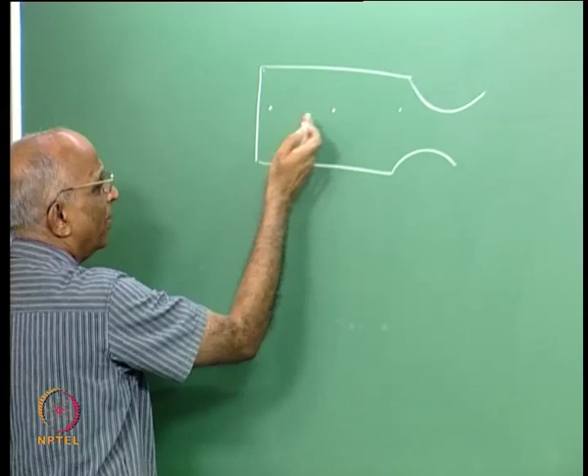In the fundamental mode, if this is a closed end, I have a pressure antinode. If this is also a closed end, I have a pressure antinode here, and in between I have a pressure node. For higher harmonics, I get a set of pressure antinodes and pressure nodes alternating.

Also, wherever we have a pressure antinode, you could have velocity nodes and vice versa. Now what is the inference of all this? Let us say at a particular point I have a pressure perturbation P, from the standing wave.

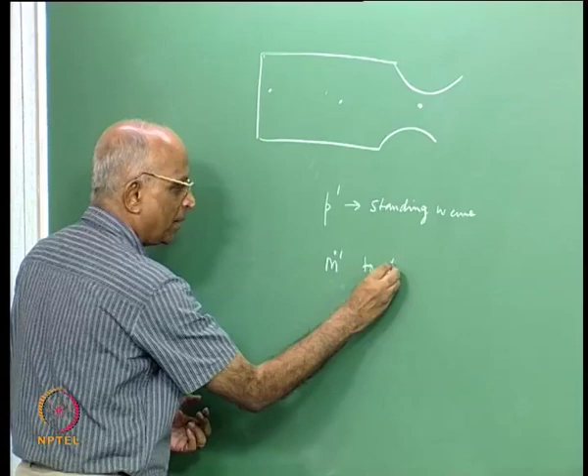I want P prime to increase. What can cause an increase in P prime? If I were to add mass, m dot prime, to a volume that has pressure P prime, then automatically I get an oscillation of P prime. If I add mass at the moment of maximum P prime, my oscillation goes up. I add mass again, pressure goes up further.

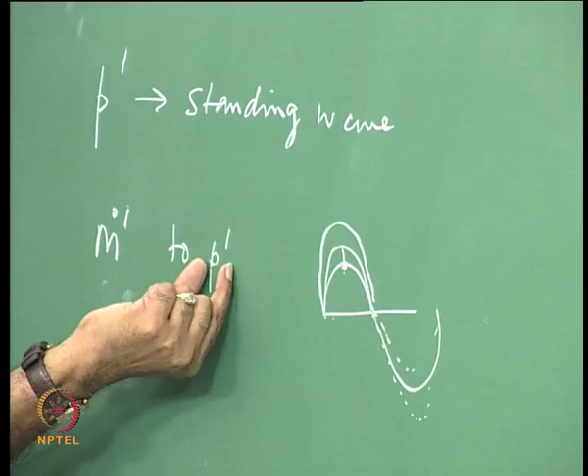If I have a condensation or rarefaction, at that point I add mass in the negative direction, meaning I remove mass, and my amplitude still goes up. Therefore, adding mass when the pressure perturbation is at a maximum can give rise to a higher value of pressure.

All I am looking at is a pressure perturbation P prime. If I add mass in the same phase as pressure, then the addition of the mass perturbation to the pressure perturbation could result in the amplitude of the pressure perturbation going up.

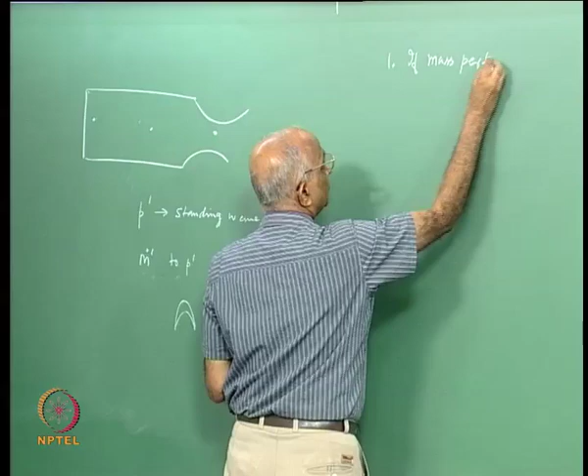So the first point: if mass perturbation is added at the same phase as the perturbation in pressure, then the pressure perturbation could increase. In other words, I am looking at the product of mass perturbation, m dot prime, and P prime, which can lead to growth of the wave motion.

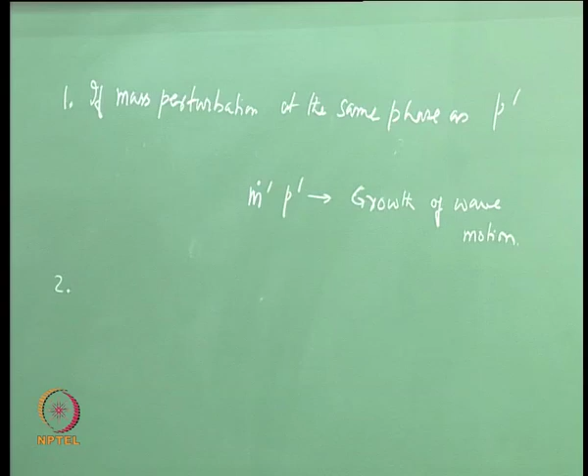Now, instead of adding mass, consider the second point. We considered velocity changes, we considered pressure changes. Whenever I have pressure changes, I could also have temperature changes.

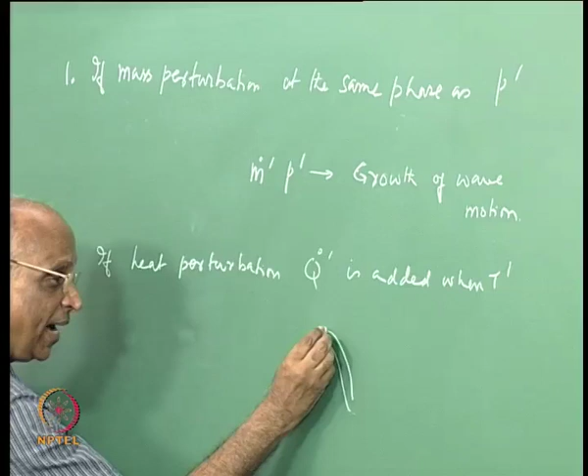So if heat could be added, a heat perturbation Q dot prime, when T prime is maximum—rather, I have a temperature fluctuation like this—I add heat when it is maximum, my temperature fluctuation will increase. I add still further heat, my temperature fluctuation will increase further.

Therefore, heat perturbation added in phase—where in phase with T prime is important—is what will give a higher value. So my zone of interest could also be: if I add heat perturbation, since in a chamber I am generating heat, I have a rate of heat release perturbation along with a temperature perturbation, and if this is in phase with that, the oscillation could increase.

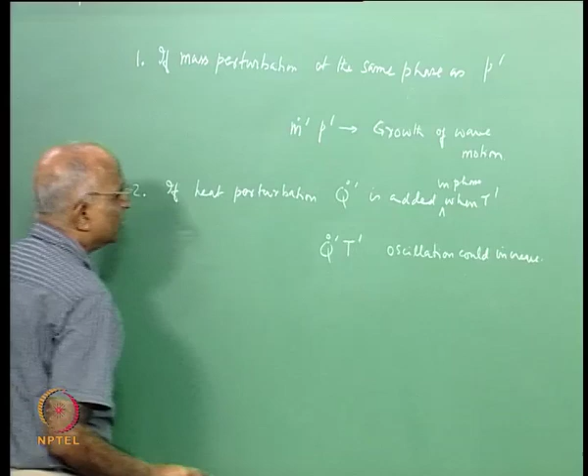We considered pressure, we considered temperature. Now the third one: if I have velocity perturbation, my velocity could also be in this particular fluctuating form. What should I do to increase the magnitude of the velocity perturbation?

Velocity perturbation is V prime. Therefore if rate of change of momentum—if at this point I put more momentum into it—the perturbation could increase; here I remove, here I add. That means if the rate of change of momentum could be put in phase with velocity perturbation, then my velocity perturbation could also increase.

In other words, the third point is: if rate of change of momentum, that is force perturbation, could be added in phase with velocity perturbation V prime, then the magnitude of V prime will increase. So the relevant quantity is force perturbation multiplied by velocity perturbation.

Pressure perturbations can increase if I could add mass perturbations in phase with pressure perturbations. Temperature perturbations could increase if I could add heat in phase with this. Velocity perturbations could add if I have rate of change of momentum in phase with this.

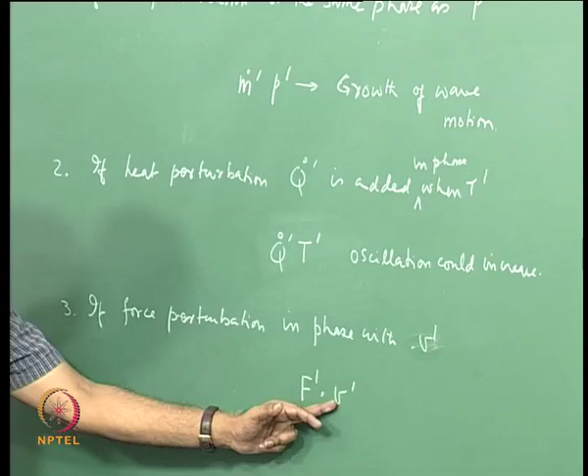What is the units I am talking of? Force in Newton, Newton meter per second, or rather joules per second. This gives me the unit of watts. If I were to put a unit over here, what is the unit I get? Let us put the unit for m dot p. M dot p is so much kilogram per second.

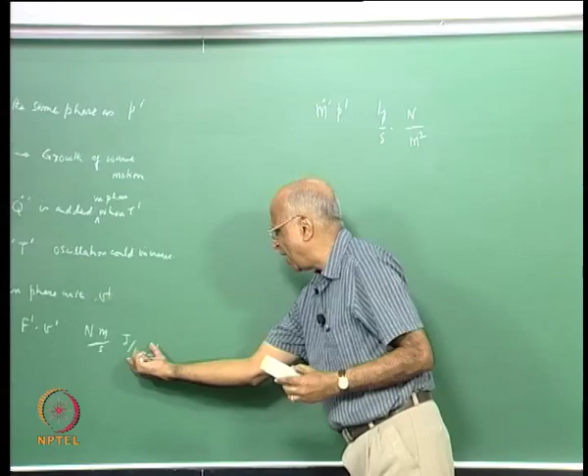Now I have pressure here, Newton per meter square, and if I have to have unit of work, because basically I am doing work to increase the perturbation, then maybe I must divide it by the mean density. If I divide it by mean density I have kilogram per meter cube, and therefore meter come here, kilogram gets cancelled, this also becomes joule per second or watts. Therefore, I can represent m dot p in terms of a function which does work on the system, as rate of work on the system, as m dot prime p prime divided by the mean density.

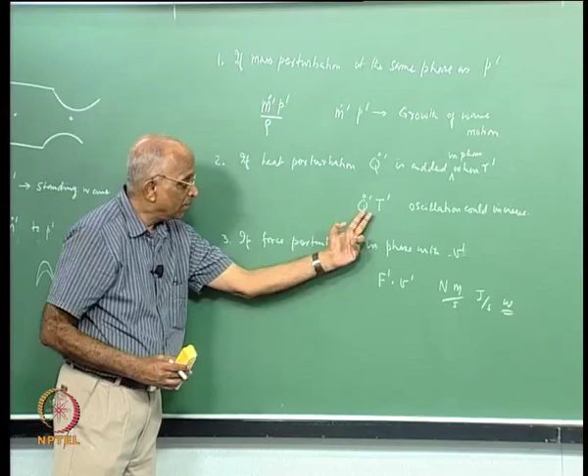How do I represent this? Q dot has energy per unit time, T prime is here, it's an addition. Maybe if I were to write in terms of so much watts or so much joules per second, T prime divided by the normal temperature, well, this also has units of watts.

Therefore, I can say if I were to add power as a product of force in phase with velocity, add power in terms of heat transfer as a function in phase with temperature perturbation, add mass in phase with pressure perturbation, well, I could amplify it. All these three things has been put together beautifully by one person by name Chu. He worked for some time in the area of combustion instability, and he put all these things together and called it the parameter sigma. The power which adds to the magnitude of oscillations could be represented by m dot prime p prime by rho.

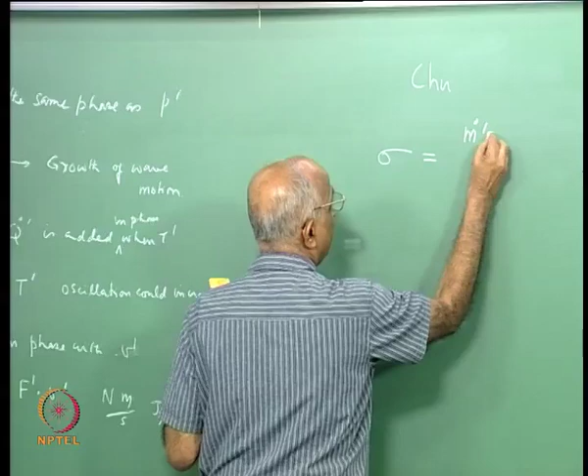This is a mass release exciting the pressure oscillations, plus q dot prime into T prime divided by the mean temperature, could be the mean density over here, plus you have force prime into velocity prime. This is the parameter which causes or which puts power or energy into the wave motion and causes the wave to grow. How do you put power? It could be from mass, it could be from heat transfer, it could be from rate of change of momentum, and we have all three things in a rocket motor.

We are generating heat, therefore heat could excite the oscillation to grow, we could have mass concentration being added, we are adding force, we are having rate of change of momentum, it could add, therefore all these three parameters are important. But in a rocket chamber again, we also have boundary layer.

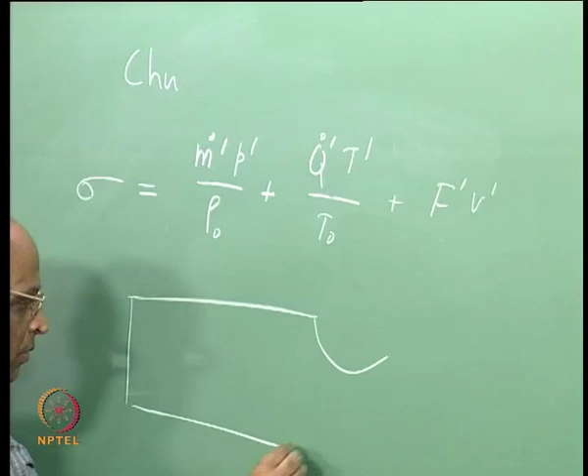This point was made earlier, it could cause viscous drag, a wave when it is travelling gets retarded by the boundary layer. Maybe if I have solid propellants, I have particulates, particulates will cause drag, it will break up the wave. It could have maybe the flow turns, and when a flow turns it loses energy, and therefore there are also some factors. Just like I have sigma watts adding energy, I could also think in terms of some capital phi which removes energy from the wave.

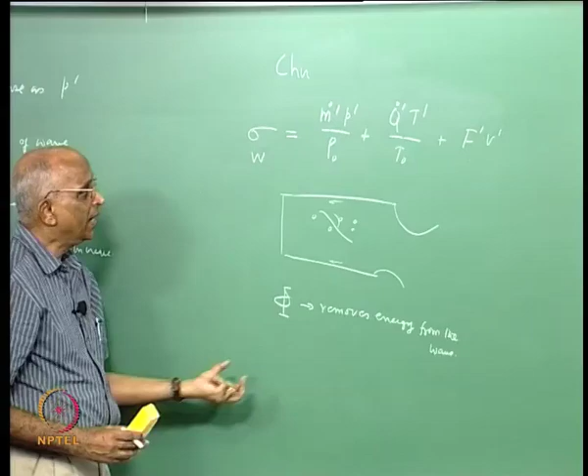That means I have sigma watts coming from mass release, from heat release, from force, and similarly I have some quantity which removes it, and the net value depends on sigma minus phi taken over the whole volume and over one cycle of oscillations, which tells me whether the wave will grow or not. If this is positive, well, I am adding more and more energy and it will grow, and with respect to time it will keep increasing like this.

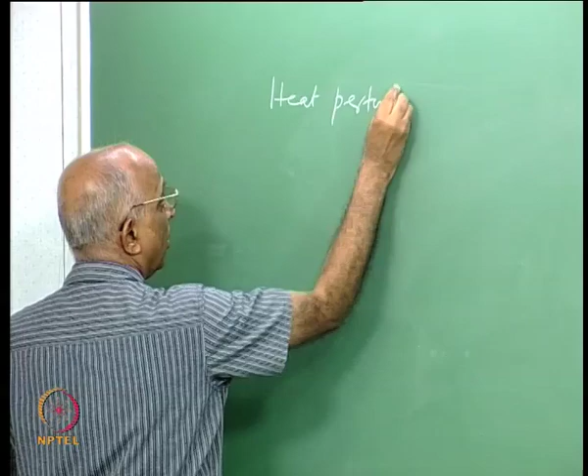This was something which was beautifully illustrated, and let us follow this up and come to some conclusions. We are just now telling heat addition in phase with temperature oscillations, that is rate of heat perturbation or disturbances in phase with temperature, in phase with temperature fluctuations.

Rather, what we are saying is P prime in phase with T prime. I'm sorry, heat perturbations means Q dot, rate of heat, in phase with T prime. But we are not really measuring temperature fluctuations. Can I therefore put it in terms of pressure fluctuations, which is what we can readily measure, and that is what we have been talking about all along.

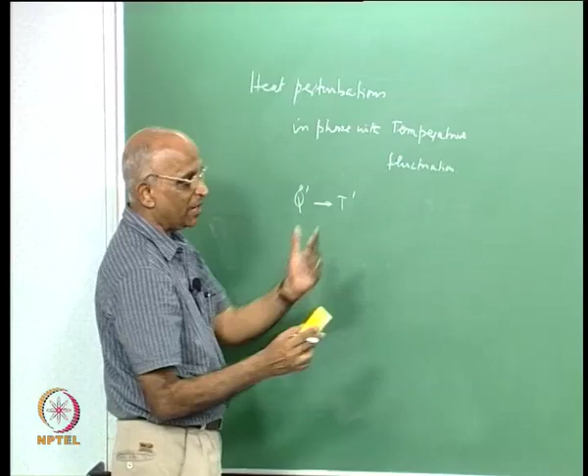Therefore, how do I convert temperature fluctuations into pressure fluctuations? We assume the system is adiabatic. Any acoustic wave is adiabatic because the pressure perturbations are small. So I can write P into V to the power gamma is a constant. I also know from the gas equation PV by T is a constant. Combining these two gives P to the power gamma minus 1 by gamma, by T is a constant. We have done this earlier: P to the power gamma, V to the power gamma, T to the power gamma, and I divide one by the other to get this expression.

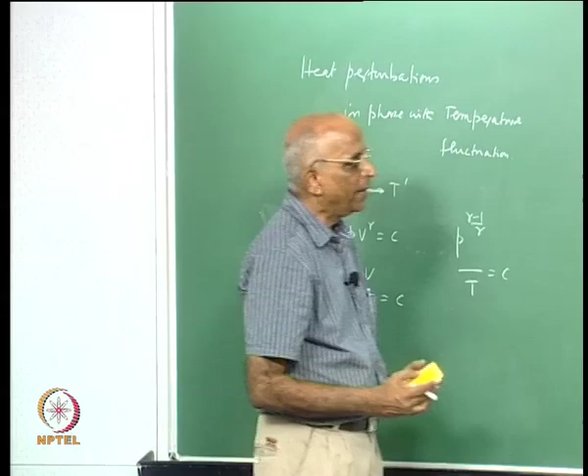If I take this expression and differentiate it, let me do it on the other side. I get P to the power gamma minus 1 by gamma, divided by T, is a constant. Taking the logarithm, gamma minus 1 by gamma into ln of P, minus ln of T, equals ln of a constant. Differentiating, gamma minus 1 by gamma into P prime divided by P is equal to T prime divided by T.

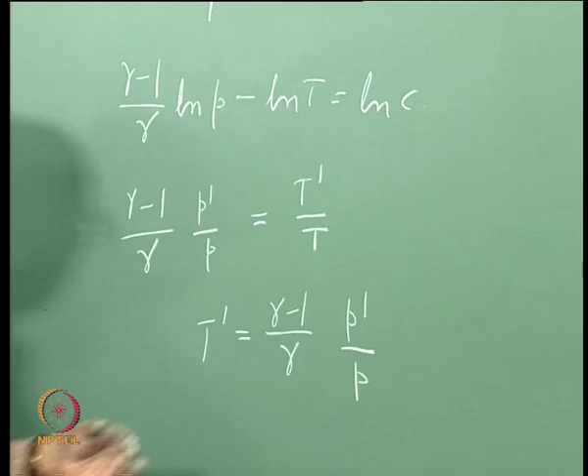ln C is a constant, this is dt by T, dt is T prime, the perturbation, this is the usual value. And therefore now I get T prime equals gamma minus 1 divided by gamma, into P prime divided by P. T prime is equal to gamma minus 1 by gamma into P prime divided by P, into T. Let us substitute this into the value we had for the case of temperature.

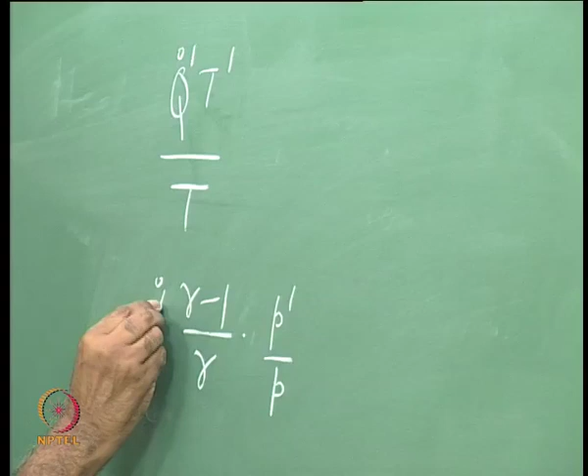What did we say? That the value of sigma, the energizing parameter, is something like Q prime into T prime divided by T. Now I take the value of T prime as I got here: T prime by T equals gamma minus 1 by gamma into P prime by P. Therefore now I find that heat release, a perturbation in heat release, when in phase with the perturbation in pressure, would also cause an oscillation, just the same way as heat release in conjunction with temperature will cause.

Physically, we know that when I add heat the temperature increases, but this is not so apparent to us. This tells us that heat release in conjunction with a pressure perturbation will lead to energy being given to the wave motion, and the oscillations will grow. This is the famous hypothesis of Rayleigh.

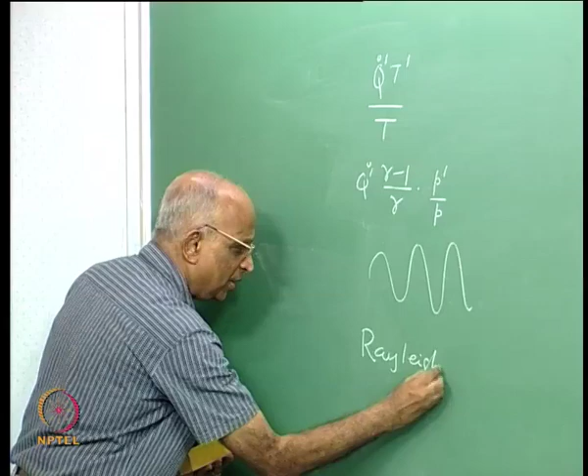It is known as Rayleigh's principle, and all Rayleigh's principle says is, if I add heat at the moment of greatest compression, or remove heat at the moment of greatest rarefaction — by condensation in the old days it meant compression — then an oscillation will be encouraged. I'll repeat it: Rayleigh's principle is extremely important because it helps us understand the role of heat release in causing an oscillation.

What does Rayleigh's theory tell you? It tells you that if I have pressure oscillations, and I add heat at the moment of greatest pressure compression, or remove heat at the moment of greatest rarefaction, then the oscillations are encouraged, meaning they will grow. This looks very apparent, but it is very basic to our thinking.

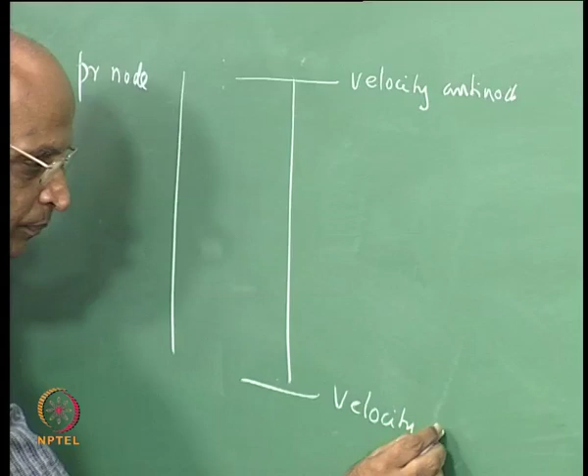Let us illustrate this through a small example. What I do is take a tube, open at both ends. Therefore I will get a velocity antinode here, and since the pressure is the same at both ends, the velocity antinode corresponds to a pressure node here. Similarly, over here I get a velocity antinode, or a pressure node, and at the center I get a pressure antinode and a velocity node. Let us add heat to this and see whether the principle really works.

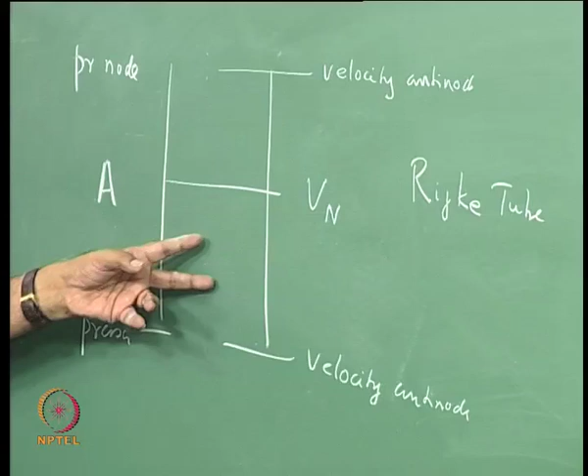The principle is demonstrated in a particular vertical tube which people call a Rijke tube. I thought we must take a look at it, such that when I add heat at some location, the tube automatically starts singing or making a noise, and that is what we will do now. Let us add heat, and for this purpose we will take a sparkler, since we need a substantial amount of heat. Let us do that.

As I keep telling you, making a fire is not that easy. Here we had a pyrogen igniter — we need to build a small fire to make a slightly bigger fire, and still make a bigger fire. So we had to light a candle to get a sparkler going. With a matchstick it's a little difficult, especially in an AC room.

Well, this is a sparkler going. Now I want to ignite a slightly bigger sparkler. I use this one because it is more energetic.

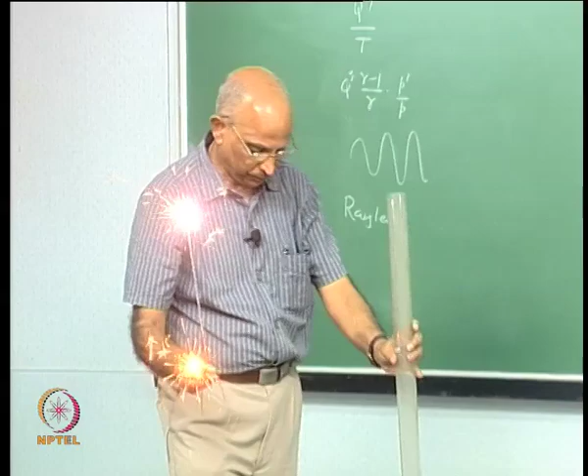Now all I do is take this vertical tube — this is the tube I have — and now I hold it vertically and introduce it. You hear the noise, right? Noise comes down.

At the location where I make a mark here, which is one-fourth the length, it makes maximum noise, and then as I keep coming down, the noise keeps coming. The question is, you just had a tube in which there is hardly anything, and all of a sudden it starts making a noise. And what is noise?

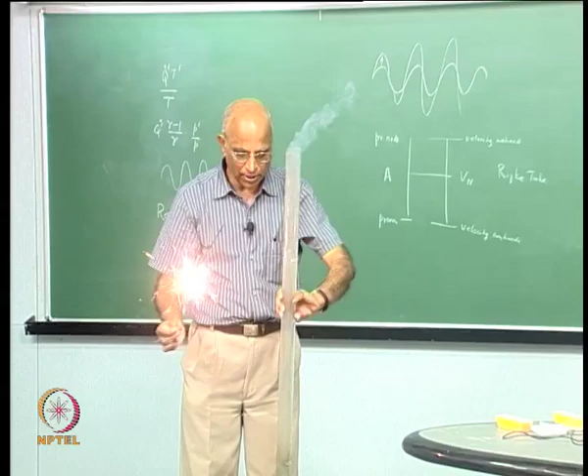Noise is sound. That means I am causing pressure perturbations, and this is what we would like to understand a little bit more. So let me invert it. If I hold it horizontally and add the flame here, nothing happens — very little, because there is some air motion, but I do not get the type of sound I normally get when it is vertical, when it is much louder. So the question is, what causes this particular sound to come?

This is what we will try to understand, and if we can understand this, I think we have understood a major part of the combustion instability problem we want to address. Well, it is almost over.

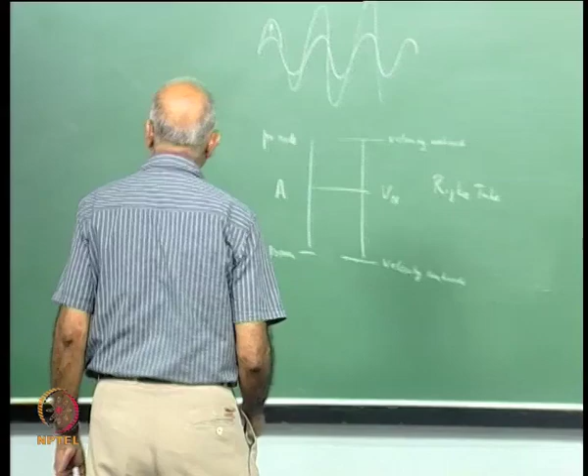So what is the experiment we just did? Let's try to analyze it. We found that the tube in the vertical condition made a lot of noise, whereas the tube in the horizontal direction also made some noise, but not as high as in the vertical tube.

What did we do? We put a heat source at some location. When I put a heat source, hot gases are convected up, they meet this boundary where I have the velocity antinode, it gets reflected, and I get something like a pressure antinode over here, a pressure node here, and a velocity antinode here.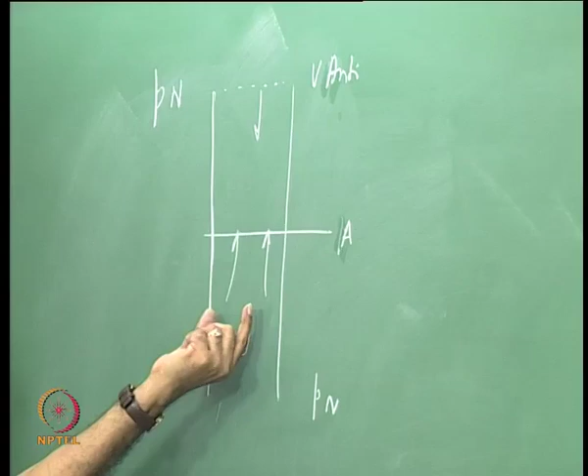And what is happening? At this central place between these two, I still have pressure oscillations and velocity oscillations in the standing wave mode, because my tube diameter is small — it doesn't give room for tangential and radial modes. So at the location with significant velocity, I have a lot of energy being added from the sparkler into the flow medium. It's also where the pressure is significant, and therefore when I put my sparkler at this location, I get maximum noise.

And what is maximum noise? I have maximum values of pressure perturbation. So putting a heat source has caused the pressure magnitudes to jump up, and that is what happens in a rocket chamber. What happens in a rocket chamber?

You have the gas flow, I have a pressure antinode, a pressure node here. Suppose I put a heat source at the location of maximum pressure — my pressure amplitude keeps increasing and my amplitude goes up. This is precisely the principle. In this case it is convective.

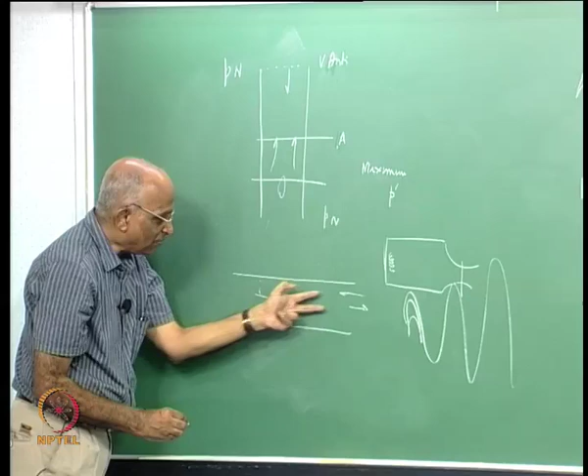I had an open tube to do a simple experiment. If I put a horizontal tube, my mass generation is large, so some gas goes up, I get oscillations like this, and when I put it here I still get some sound. But normally the sound in the vertical case was much higher, because I am able to get the convective motion to give a stronger wave interaction, whereas here the velocities are much lower — in the vertical case I have buoyancy effects which help me, but that doesn't help here.

Here I will get mixed modes. If you had really looked at the sound, I would have gotten something like radial modes and other modes coming here, whereas in the vertical tube it is purely axial.

If this part is clear, let us quickly go through what little we have understood so far. Well, we tell ourselves it is not only that.

In other words, acoustics, like what we are showing, that is the heat addition or the acoustics, is affected by this, and that happens because of the pressure perturbations in resonance or in phase with the pressure or velocity fluctuations, that is heat release fluctuations.

Here he is striking a note, generating waves which go up and down, and you have an astonishing variety of processes. In fact, Tyndall at that time thought that by looking at a flame, when he sings something, maybe even a person who cannot hear music would be able to appreciate the signals coming from a flame and thus appreciate the music visually, by seeing a singing flame.

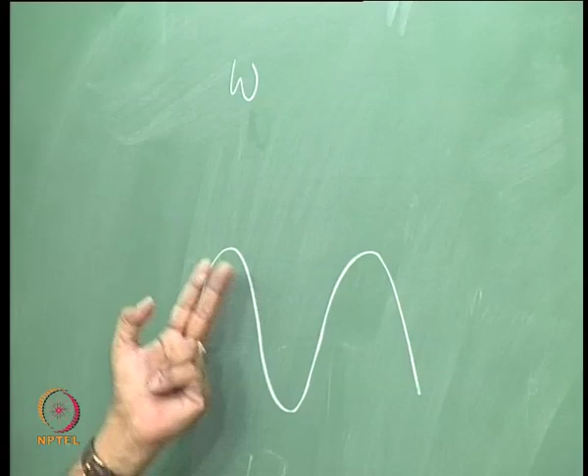But one important thing we haven't said so far: we have standing waves of a given frequency, and we also say the heat release, mass release, or velocity changes should be in phase. That means the frequency of the heat release must also be at the same frequency. If the frequency of the heat release differs from the frequency of the standing wave, then once I add heat, the second time I add heat it may not reinforce it. Therefore, it is essential that the frequency of heat release should also be the same.

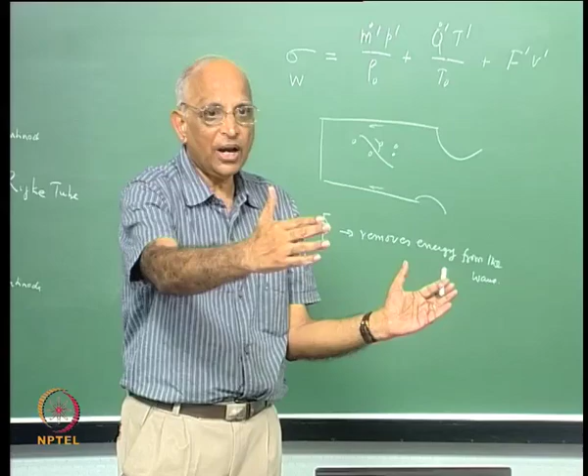And therefore we talk not just in terms of a dumb heat release, but the frequency matters. If I had a slightly shorter Rijke tube, it would have a much higher frequency — so high we may not even be able to hear it — and that is why I chose this particular length of about 1.2 meters.

This is all what I showed you earlier: rate of mass addition perturbations in phase with pressure will lead to enhancement. Similarly, rate of heat release fluctuations in phase with temperature fluctuations, from which we derived the Rayleigh criterion for heat release. Similarly, force perturbations in phase with velocity perturbations, or a periodic body force in phase with velocity fluctuations, give power to increase the oscillations, and we put all these things together.

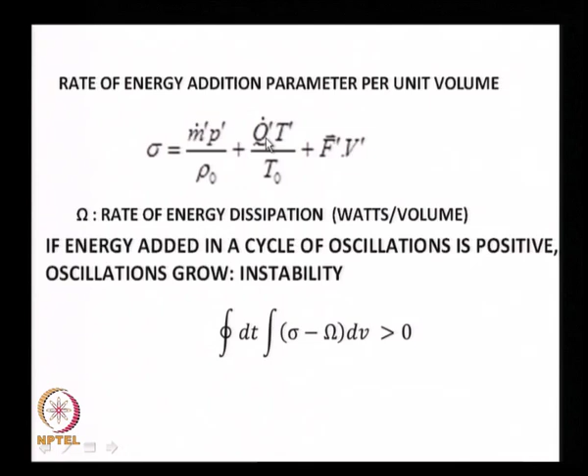We had a dissipation term and an energy-supplying term over a cycle of oscillations. If it is greater than zero, an oscillation could occur. The only important thing to remember is that Q prime and P prime should have the same frequency, otherwise it is just not possible to get this — that is basic to it.

This is what we just saw — thermoacoustics. If we put a heat source here, we could hear the sound, meaning pressure perturbations are growing. In a solid propellant, these are AP particles in the resin, with a flame standoff here where aluminum particles are burning; this dampens the wave just like a boundary dampens the wave, leading to sigma minus omega.

If I have a liquid propellant rocket, I have an injector and a zone of heat release, and therefore I could have tangential and radial modes causing this, and you could end up having pressure perturbations. This is all about combustion instability.

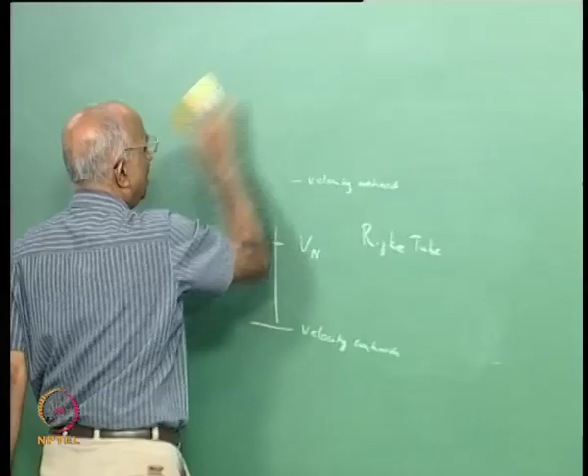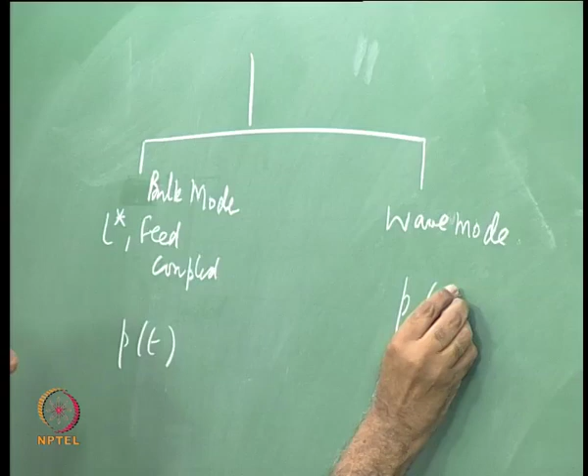Now I should be able to put things together. Let us review what we have done so far. We have understood what combustion instability means. We started with feed coupled oscillations, in which pressure is a function of time alone. Then we talked in terms of the wave mode, and I should have written here the bulk mode. In the wave mode, pressure is a function of distance and time, which is varying. Here you form standing waves.

If heat release is at the same frequency, and because it is unsteady heat release in conjunction at the point of maximum pressure perturbation, you add heat, and I get an oscillation. It need not be from heat alone, it could be from mass addition also in phase with a pressure perturbation, or it could also happen with a body force perturbation in conjunction with a velocity perturbation.

Now we know why combustion instability has to occur. We have energy being supplied by the combustion process, it drives the oscillatory pressure. In some cases the pressure perturbations keep on increasing. Therefore, let us put the subject in proper focus.

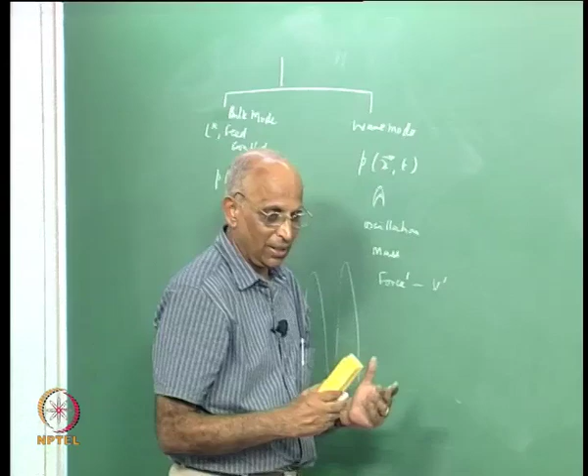A rocket is a small chamber that generates a lot of heat compared to, let us say, an aeroplane gas turbine chamber or a car, whose rate of heat release is something like 0.1 kilowatt per centimeter cube, much lower than a plane which is of the order of 5 kilowatt per centimeter cube. A rocket gives something like 100 kilowatts, like the RD-170 engine I showed you, which burns liquid kerosene and liquid oxygen at a pressure of almost 245 bar, and this was a very powerful staged combustion engine.

The type of energy we are getting is something like 1000 kilowatt per centimeter cube, and whenever we talk of something like an explosion, this is the type of energy release we get. Therefore, even a minuscule amount of this energy, if it gets into the wave mode, could start causing oscillations. To figure out how much of the heat release gets into the oscillation, we have specific devices. This is something we must know.

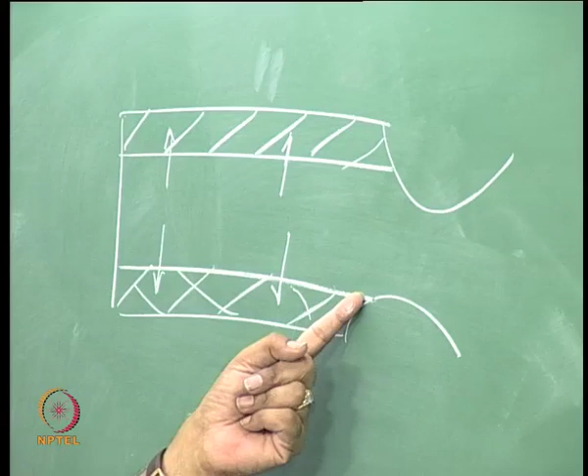Suppose I want to measure the growth constant of a propellant. Suppose I have a solid propellant in a chamber, burning radially. I find that the propellant burning here is at a pressure antinode. At the center it is a pressure node corresponding to the fundamental. Here it is near a pressure antinode.

Different points are at different locations, but what I am interested in is the value of phi minus sigma. If it is greater than 0, it is unstable. And what did we say? The integral over the volume over a cycle of time, that means over a cycle of oscillations, must be greater than 0, or rather I can reduce this to the form of the growth constant.

If I were to look at a propellant and evaluate this, we said oscillations can be put in terms of growth plus the frequency to the power t. This tells me the rate at which oscillations are growing. Can I measure this growth constant of a propellant?

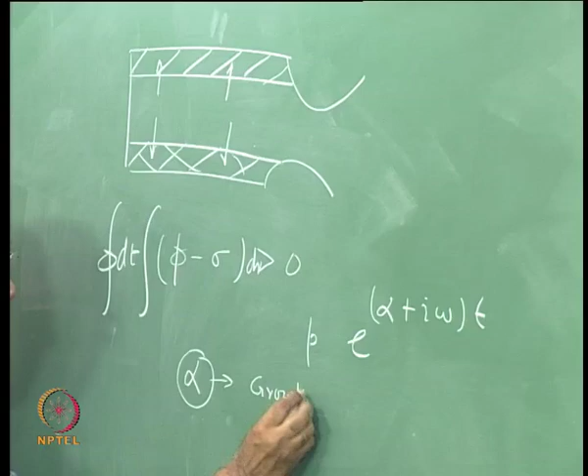To measure this, I make a tube. I make the length of the tube such that I get the same frequency as my chamber, the standing wave mode of the chamber. In the fundamental, this length gives me this frequency. I put a slab of propellant at the end, that is, at the pressure antinode, where I can get the precise value of the pressure antinode. I ignite it, I burn it, and what is it I observe?

That means I have something at the antinodes. I put the solid propellant, the length is L for the given frequency. I also put a tank such that I can maintain the pressure at the level of the pressure in the chamber. We would like to know the rate at which the oscillations grow.

We are interested in finding the value of p prime as a function of p hat, and since we are interested in the growth of these oscillations, we want to find the growth constant alpha. When the oscillations grow, alpha is positive, and that is what we measure in a T burner.

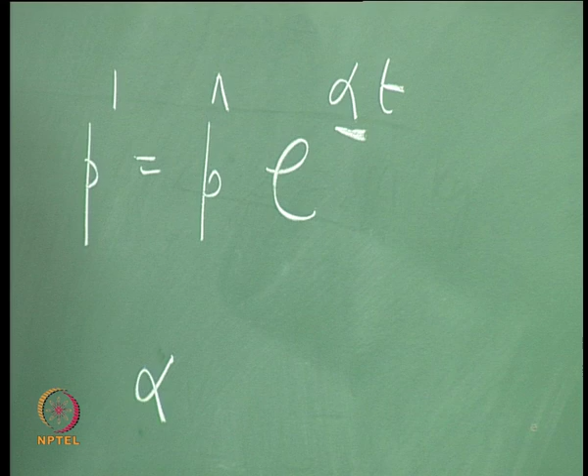Let me come back to this. In a T burner, you have a tube like this, with the propellants at the ends of the tube. At the center you have a hole, and we said earlier that at the ends you have pressure antinodes, while at the center you have a pressure node. At the pressure node you connect it to a huge surge tank, by which, by keeping a pressure of gas here, you can maintain the pressure in the tube at any value you want.

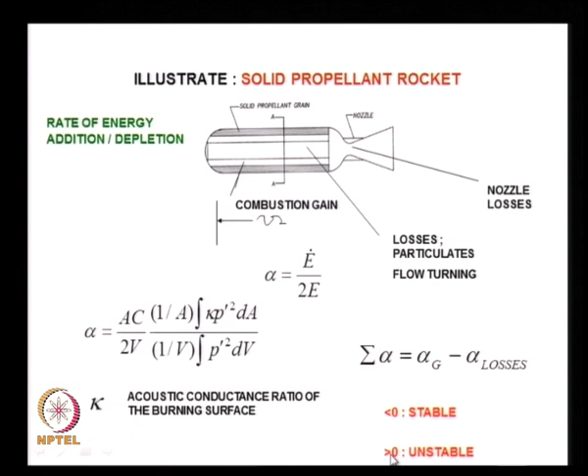If the net value of alpha is less than 0, we say the motor is stable because the energy in the waves is less, or the pressure amplitudes keep decreasing, while if it is greater than 0, the motor becomes unstable. We must keep one thing in mind: whenever we talk of oscillations, whether in a T burner or in a rocket, they are all at a particular frequency.

I get a spike, which tells me the pressure amplitude as a function of frequency. I get pressure amplitudes at a given frequency, and they are not distributed over a range of frequencies. In other words, these are unique to particular frequencies, and I evaluate the growth constant in a T burner at the frequency of the rocket motor, use that value to get the growth constant in the motor, subtract the losses, and thereafter determine the stability of the motor.

What I was trying to tell you was, under certain conditions, depending on the chamber conditions or the rate at which droplets are introduced, you have a zone at which energy is getting released.

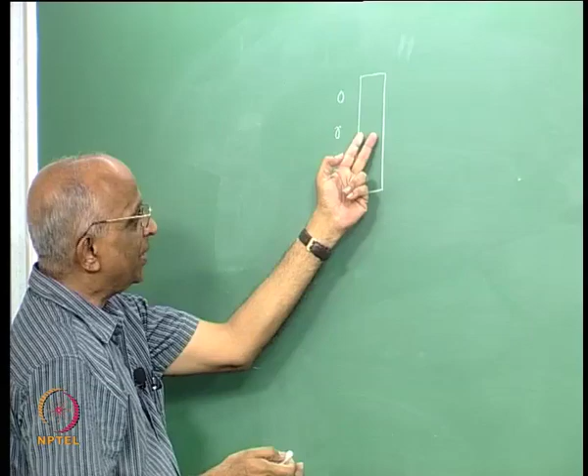If I have a pressure antinode or a velocity antinode wherein the heat transfer is higher, or a pressure antinode is in the same phase as the heat release, my oscillations will grow, and such oscillations are also referred to as acoustic oscillations. Why acoustic oscillations? Because of the acoustics, that is the sound waves getting reflected, forming a standing wave, and instead of calling it wave mode oscillations, it is also known as acoustic oscillations.

What is the characteristic of acoustic oscillation? The pressure perturbations are small compared to the mean value of pressure. Like when I talk, it is all isentropic, the pressure changes are very small—we are talking of very small values—but under certain conditions the oscillations become non-linear.

What do you mean by non-linear? In a linear process I can decouple this: P prime happens at a frequency omega 1, the first fundamental, and the higher harmonics omega 2, omega 3. I can write the equation as P1 prime sin omega 1 t plus P2 prime sin omega 2 t plus P3 prime sin omega 3 t and so on, and these can all be clearly separated because it is a linear system.

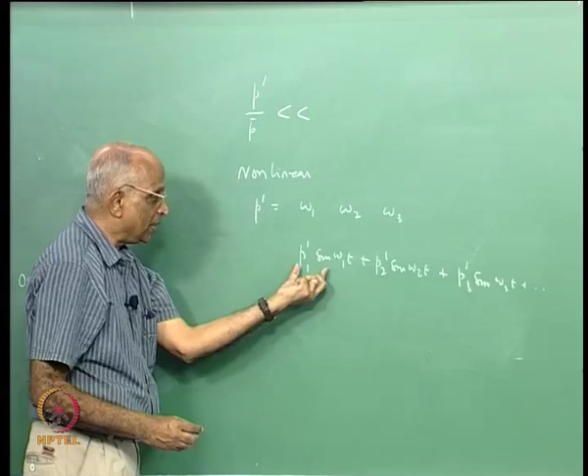But when it becomes non-linear, the frequency here could interact with the frequency there and I could get a new set of processes. That means wave interaction could still happen in a non-linear mode. Supposing this is my pressure perturbation, and this is my response—how do I define response? I can say response is equal to the rate of mass fluctuation divided by its mean value, divided by the pressure perturbation divided by the mean value P0.

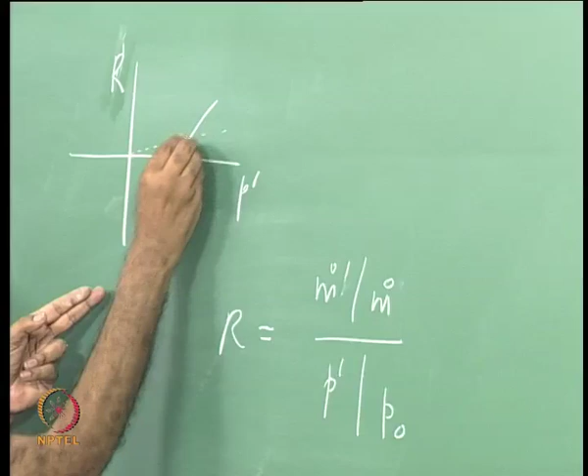What happens if I plot the response over this? Normally I should have got a response somewhere over here, but I do not get any response over here. When I have a sufficiently large value, all of a sudden response comes up—meaning I need a finite pressure oscillation to start an instability—and these are known as nonlinear instabilities.

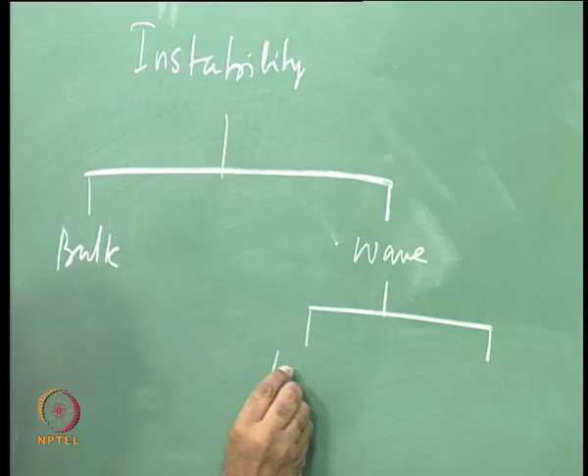Therefore, we can characterize the instabilities further. Let us put the whole thing together: combustion instability happening from bulk mode oscillation—we have covered enough about that. It could be in the wave mode, and it could again happen in the linear mode, wherein small threshold values of pressure excite it, or non-linear, wherein a definite value of delta P prime is required to start an oscillation.

Why is that delta P required? Because some losses have to be overcome, it becomes non-linear, but I can use all these things together to get a feel for the problem.

The question is, if I have understood the problem, what we require as engineers is that the rocket chamber must not go through a process of oscillation, it must not build up oscillation. How do I do it?

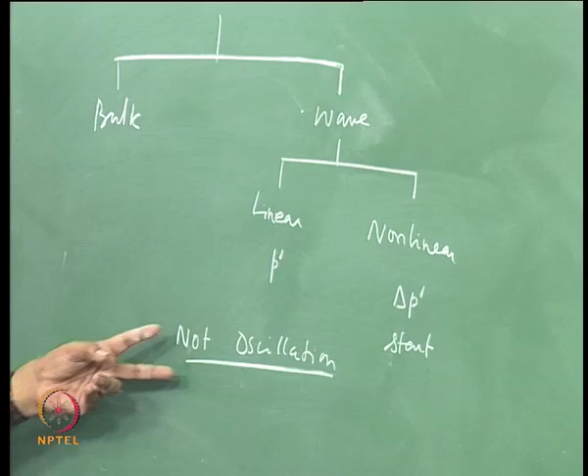One approach: if I have a chamber, I add energy to the chamber, and rocket chambers have huge energy. If I can reduce the amount of energy, like adding some water into the propellant such that I decrease the rate of energy I put into the oscillation, then it won't grow. Therefore, I can prevent oscillation by reducing the energy rate of release.

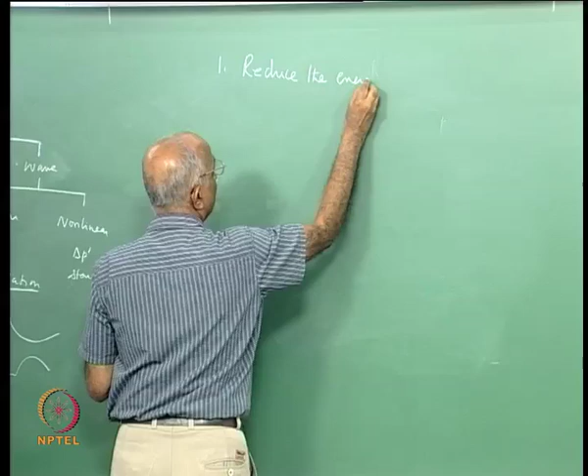That means point one: reduce the energy release rate from the propellant.

What you are essentially doing is having some gain in energy, the oscillation gaining energy from the propellant. Therefore what we do is reduce the gain.

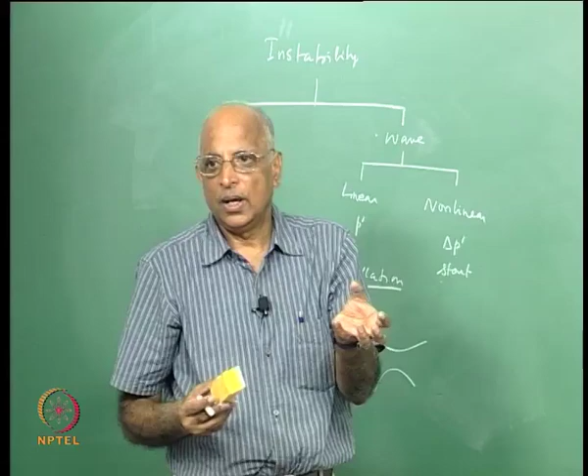Let us take a simple example. I switch on a TV, I want to increase the volume, I increase the gain, I hear something loudly. I reduce the gain such that my input energy itself is reduced.

Second is, I sort of detune my chamber. What do you mean by detuning the chamber? Combustion occurs at a certain response frequency, and when my frequency of combustion and my frequency of chamber are the same, I get oscillations.

Just as we tune to different frequencies for different signals, if my chamber is like this, in the axial direction, I may make the chamber a little shorter such that I increase the frequency of my chamber, keeping the combustion frequency the same. Therefore I detune my chamber with respect to combustion, and that is one way of avoiding instability.

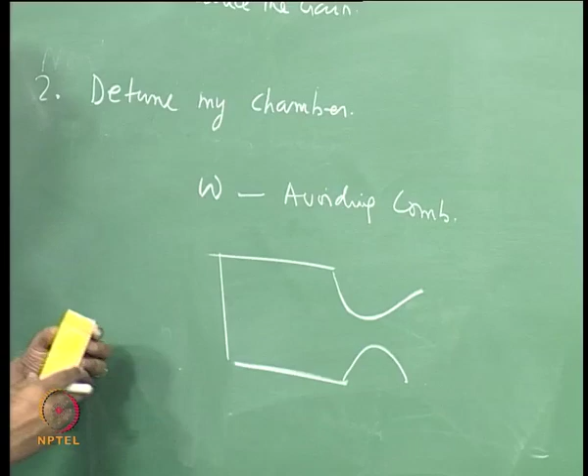The basic process of avoiding combustion instability is either you reduce the gain coming from the propellant, or you make the frequency of the chamber different. But it is very difficult to reduce the length or change the diameter.

What we do is put something like what I show here. Either you change the dimensions of the chamber, or change the configuration such that I redistribute the combustion away from the antinode into the node.

I put something like a baffle, protrusions in the chamber, and when something is rotating in the tangential direction, the baffle breaks it up, increasing the frequency of the standing wave in the tangential and radial directions, and therefore I detune my chamber.

I can also put something like a Helmholtz resonator, a different frequency resonator, giving a net frequency which is different. Or I put a tube or opening here to increase the effective length and change my frequency. These are known as quarter wave tubes.

One of the things the Russians seem to follow, which is of interest to us, is what I show in the figure here.

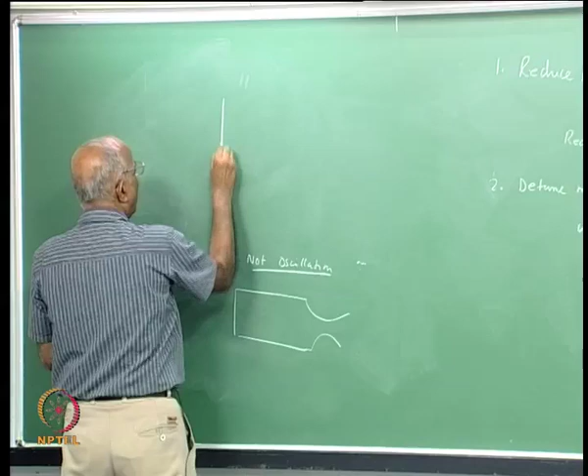If I have a chamber like this, with a nozzle like this, and I make the convergent section much longer, I get smaller rates of density variation, because the density variation for the same throat size is different. Initially this was my throat, with the area here, and a divergent section. Now instead, I delay it, getting something like this, with my divergent section here. That means my rate of density variation is much lower.

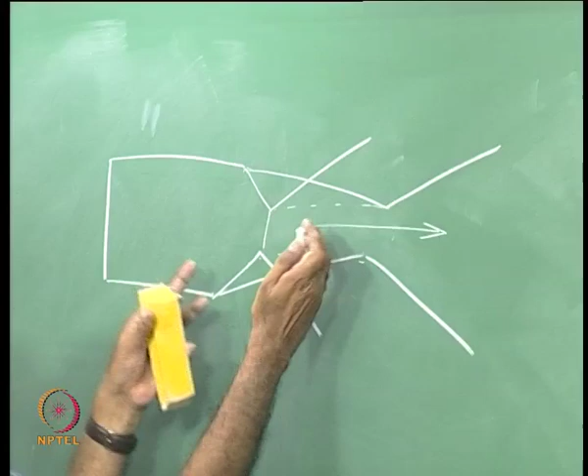I can allow some of the acoustic energy to radiate out instead of getting into the stationary standing wave pattern, and therefore my chances improve. That means I allow the nozzle to radiate out the wave.

Well, these are some correction strategies. This figure shows an opening here, meaning I slightly change the tangential mode, because the dimensions inside here I put a slot, the dimension increases, and this has been effective in reducing the combustion instability of one of the Viking engines, a 60-ton liquid propellant rocket.

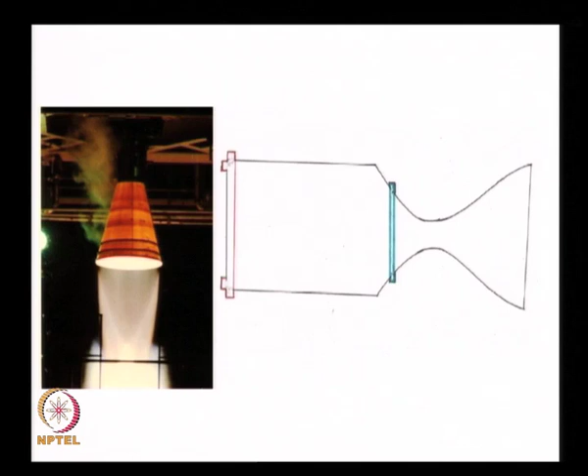Let's go further now. We said there are different types of instabilities, and let's now talk of the third type, in which instead of the wave mode or the bulk mode of instability, combustion instability could also be caused by processes. What are the processes we are talking of?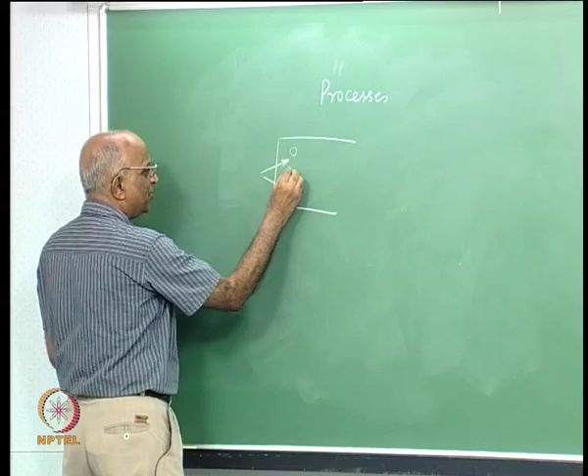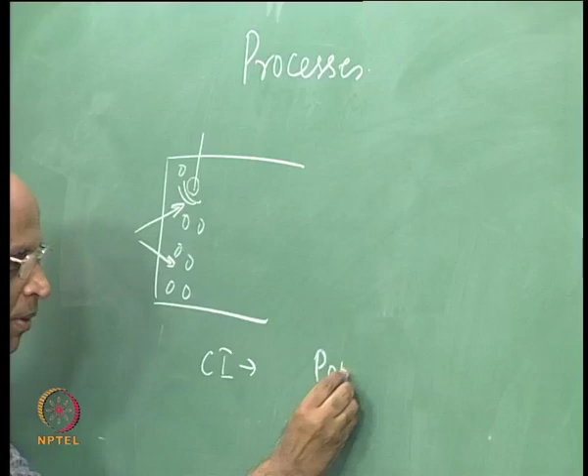Let's consider hydrazine or MMH injected as fuel, and N2O4 injected as oxidizer. You have variations in mixture ratio in different parts. Recall the stream tube model analysis: in some places I could have very good stoichiometric mixture ratio, in some places a very lean mixture ratio, so I have mixture ratio variations. In the stoichiometric region the fuel burns readily, creating wave motion, which could lead to combustion instability. Very often the stoichiometric composition, when heated, is so powerful it creates explosions which create wave motion, and this is known as popping. You hear a popping sound, which couples with the chamber acoustics, giving popping instability, essentially due to mixture ratio variations.

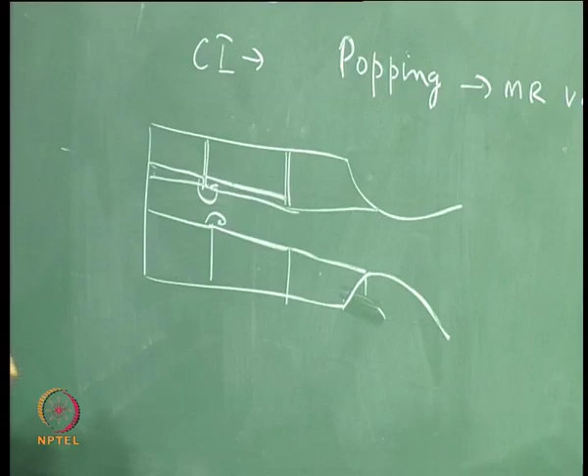You'll also remember we talked about solid propellant rockets being segmented rockets, with segments joined together. Wherever segments are joined, you have inhibitors joining them. As the propellant burns, these segments get exposed, and eddies are formed. If the frequency of these eddies coincides with the natural frequencies, I could get oscillations. This is the second process: segmented joints in solid propellant rockets.

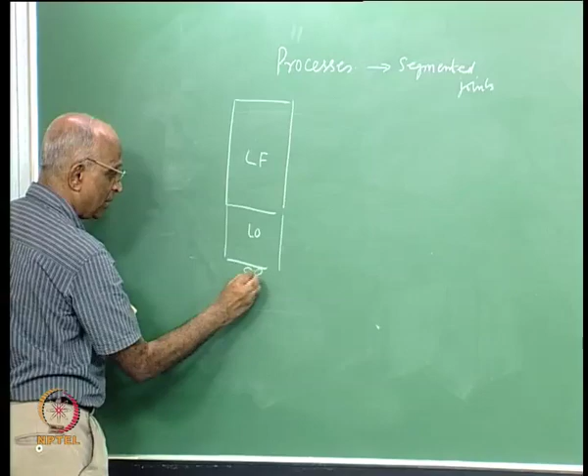I could also think of a new process. Whenever I talk of liquid propellant rockets, I have a large propellant tank, maybe liquid oxidizer, maybe liquid fuel, with another tank sharing a common bulkhead. This is liquid fuel, this is liquid oxidizer, supplying through pumps to my liquid engine, the thrust chamber.

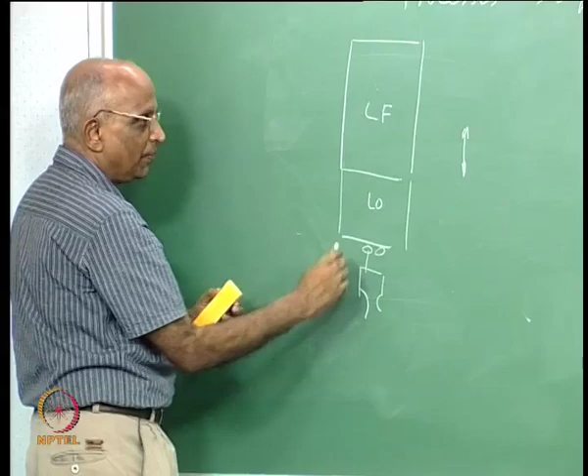Under certain conditions, when thrust is generated, I have the head of the propellant here, and these are all columns in the tank. The tank can vibrate in the normal direction, oscillating up and down; the structure could vibrate like this, and when it vibrates, the head of the fuel at the pump inlet increases. Let me draw a schematic diagram.

I have a tank, which supplies fuel and oxidizer to my pump. From the outlet of the pump it gets into my thrust chamber, which is the combustion chamber, and this is what produces my thrust force.

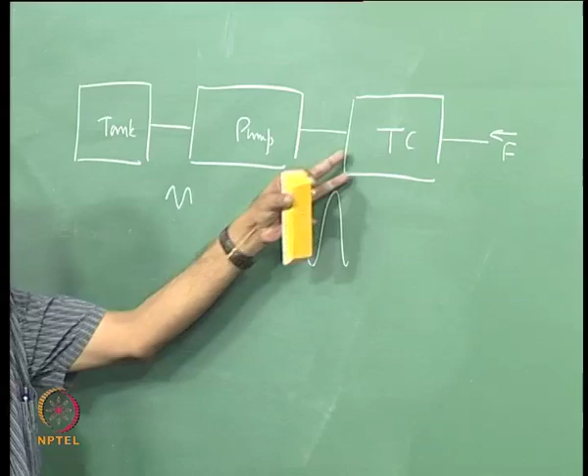Because of the structural oscillations of the tank, my inlet head to the pump changes, giving a modulation in the head. At the outlet, pump pressure increases and the modulation increases. When the modulation increases, I am supplying propellants at a modulated rate into the thrust chamber, and therefore my force changes. The force further changes and gets in phase with the structural changes, producing a feedback.

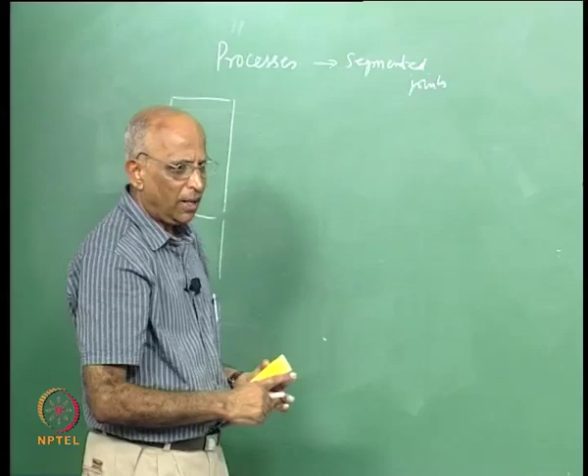This feedback into my tank increases the structural oscillations, so the rocket finds that some pressure is there, thrust suddenly increases, jumps up like this, comes back, goes up again, something like in spurts. Instead of the rocket going normally in a mission, under certain conditions it goes like this, like hopping. The name for this hopping is what we know as Pogo.

See, this is a large tankage that is shown here. This is the pump, this is the nozzle, and this is a boy on a stick. The stick has a spring, he puts his foot on a pedal, there is a spring here, and he sits like this. This is where you keep your foot, this is where you keep your hand, and there is a spring mechanism between this and this. Supposing I want to hop, he puts his hand here, puts it together, and is able to hop. This is known as a pogo stick.

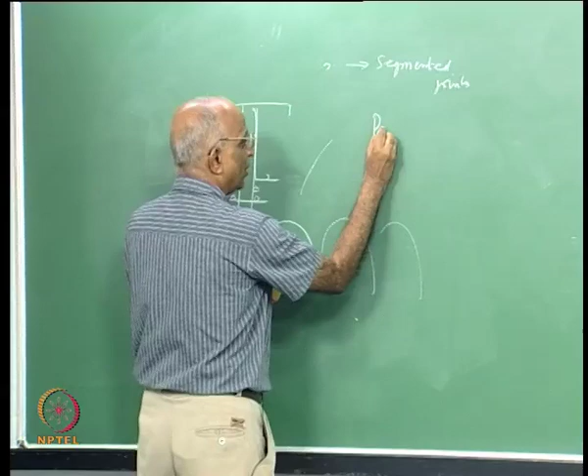What is it we are telling? I have a contraption like this, I have a handle, I hold on to the handle, put my foot here, I have a series of springs, and this is connected to my bottom. Supposing I want to go like a kangaroo, I go from here to here, I can hop like this. In fact, in many countries you have pogo stick races held every year. And therefore my rocket, instead of going up smoothly, goes in hops like this, and this type of oscillation due to this process is known as pogo oscillations.

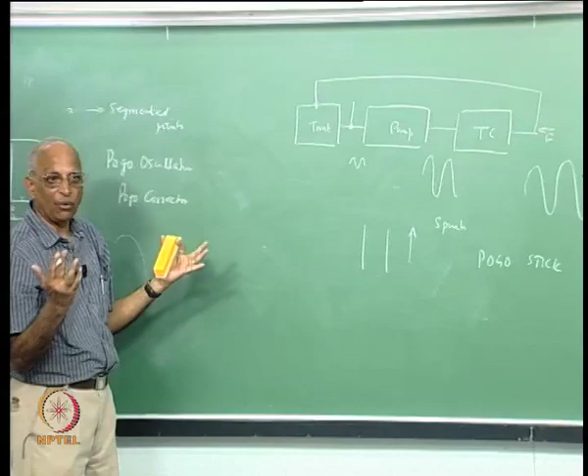And how do I have to control it? I must reduce the coupling between my pump and the thrust chamber. Maybe where I get these oscillations, I put some gas into the liquid, that means I put some small vapor bubbles into the liquid. Vapor bubbles can absorb a lot of energy, and therefore I will not get these oscillations. So I have something like a Pogo corrector, which I put here and it corrects my oscillation. This is present in many missions; in all rockets or launch vehicles we have Pogo correctors.

Similarly, one point some of you made was, how about sloshing? I have a liquid in a tank. The rocket is going up - this does not happen when you ground fire a rocket. This is a propellant tank; from the propellant tank I take the propellants and give it into the chamber. Now if the rocket is going up, I just get a straight axial load, but the rocket also turns, so I could get side loads, not only from the rocket, but maybe from wind bias.

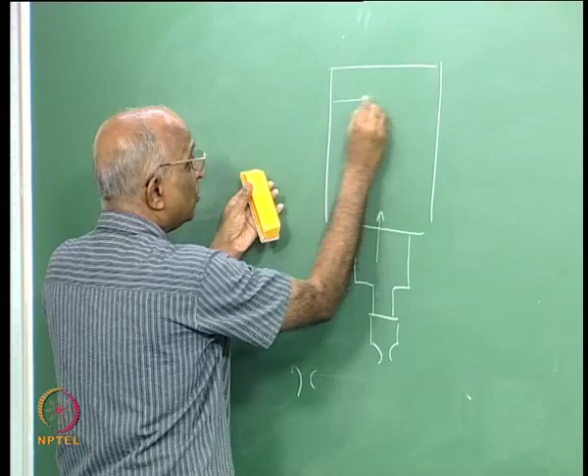When I get the side loads, my surface of the liquid, instead of being plane, becomes a wave motion. This wave motion, traveling up and down, again provides side loads to my rocket. We start getting side loads because the propellant sloshes, that is the free surface of the propellant changes. Therefore it becomes necessary for me to put some material, something like baffles, which because of viscous dissipation will not allow this to happen, so I put baffles in my propellant tank to avoid sloshing.

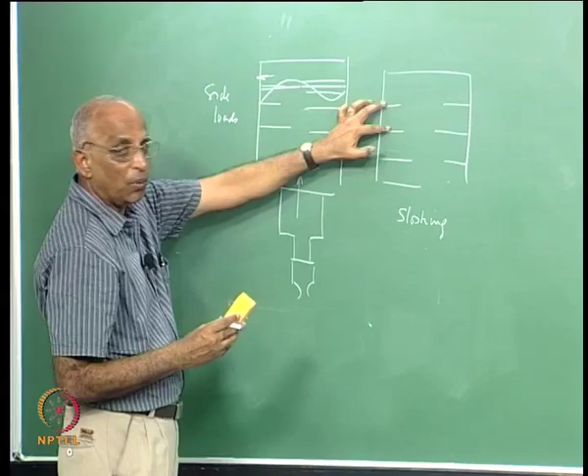Sloshing is not a form of instability, but it is still a concern for the mission, because the free surface area changes and you would not like these free surface changes. Therefore you put baffles to avoid sloshing. Let us take a look at these baffles put for sloshing. Yes, this is where it is - you put some baffles so that the liquid does not slosh. Movement of liquid having a free surface in a container, when it goes from side to side, gives you a sloshing load, and baffles are used to prevent sloshing.

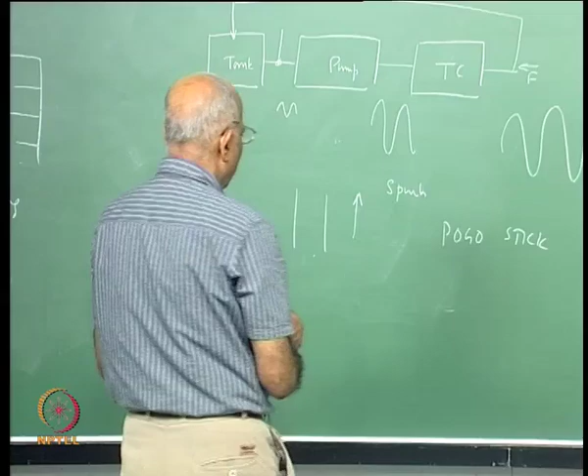We will conclude by saying a liquid propellant rocket or a solid propellant rocket is susceptible to instability, and this instability could be defined in terms of bulk mode oscillations, wave mode oscillations, or different processes. We did not get into details of solid propellant, wherein oxidizers burning up give a particular frequency of depletion, but these are details - what we have covered is the basics of combustion instability.

To summarize, in today's class we started with wave modes, we looked at standing wave modes, we found out under what conditions wave amplification can take place, and then we said combustion energy is getting liberated and therefore instability can form. We also talked briefly about process-induced combustion instabilities. I think we stop with combustion instability here. In the next class we will start with maybe electrical propulsion. Thank you then.